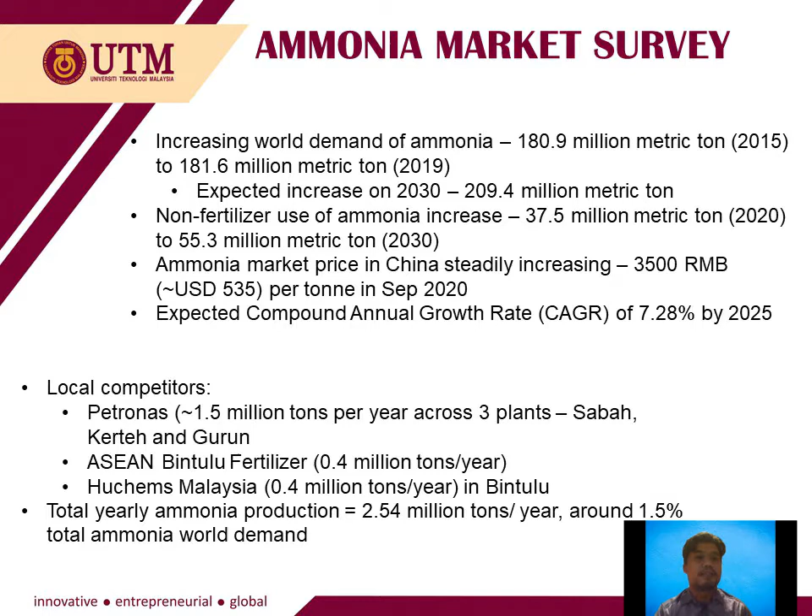And we also chose ammonia as our product due to our local yearly ammonia production, which is around 2.54 million tons per year, which is around 1.5% of total ammonia world demand. So we can see the potential of building another ammonia production plant in Malaysia.

Okay, we chose to build our ammonia production plant in Gebeng Industrial Estate, which is situated in Pahang, due to the attractive incentives and initiatives by the Pahang State Government to promote Pahang as one of the biggest industrial hubs in Malaysia. Also, there are no direct ammonia process plant competitors around the area, so it can help our distribution of ammonia locally.

Also, there are low and competitive utility tariffs, which is a low water tariff by Pengurusan Air Pahang Berhad, so it can help on our production cost and also increase our production profit. Also, in this area, there is development of the Malaysia-China Kuantan Industrial Park, MCKIP, in conjunction with China, which can help our ammonia export to China and also to the world ammonia demand.

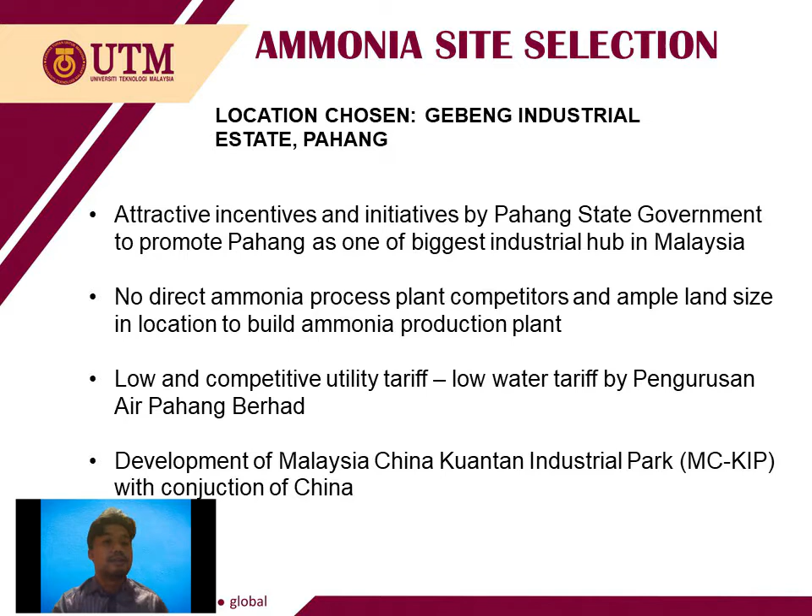Hi, I am Shuaina Shafi. So now we are going to proceed with the reaction pathway to produce ammonia. Basically, the reaction pathways that we propose are the Haber-Bosch process, thermochemical cycle process, and direct synthesis by catalytic reduction of nitric oxide with hydrogen and addition of carbon monoxide. But for our project, we chose the Haber-Bosch process, and I will explain further why we chose that process.

The Haber-Bosch process is an artificial nitrogen fixation process. The process converts atmospheric nitrogen to ammonia by reaction with hydrogen using a metal catalyst under high temperature and pressure. The method for producing hydrogen from hydrocarbons is known as steam reforming.

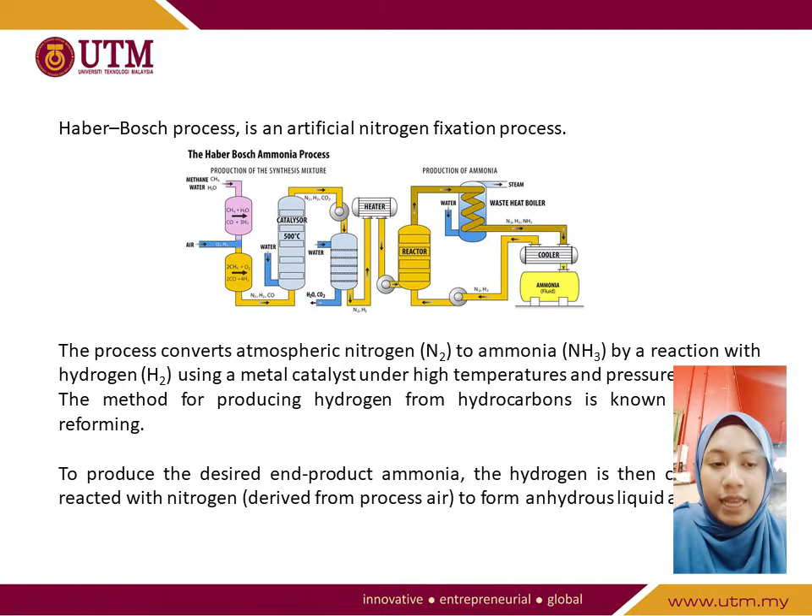To produce the desired end product ammonia, the hydrogen is then catalytically reacted with nitrogen, which is derived from processed air, to form anhydrous liquid ammonia. So this step is known as the ammonia synthesis loop, also referred to as the Haber-Bosch process. Here is the reaction: 3 H2 plus N2 to produce 2 moles of NH3.

Due to the nature of the catalyst used in the ammonia synthesis reaction, only very low levels of oxygen-containing compounds, especially carbon monoxide, carbon dioxide and water, can be tolerated in the synthesis gas, which is the hydrogen and nitrogen mixture. Relatively pure nitrogen can be obtained by air separation, but additional oxygen removal may be required.

As you can see, for gross profit, the weightage is 40%, conversion selectivity 25%, temperature 15%, and produced byproduct 20%. For gross profit, the score for reaction pathway 1 is the highest, which is 5, and the mark is 2, compared to reaction pathway 2, 1.6, and reaction pathway 3, 0.4. After we calculate, the gross profit for reaction pathway 2 is 0.471 and reaction pathway 3 is negative 4.781, which is lower than reaction pathway 1.

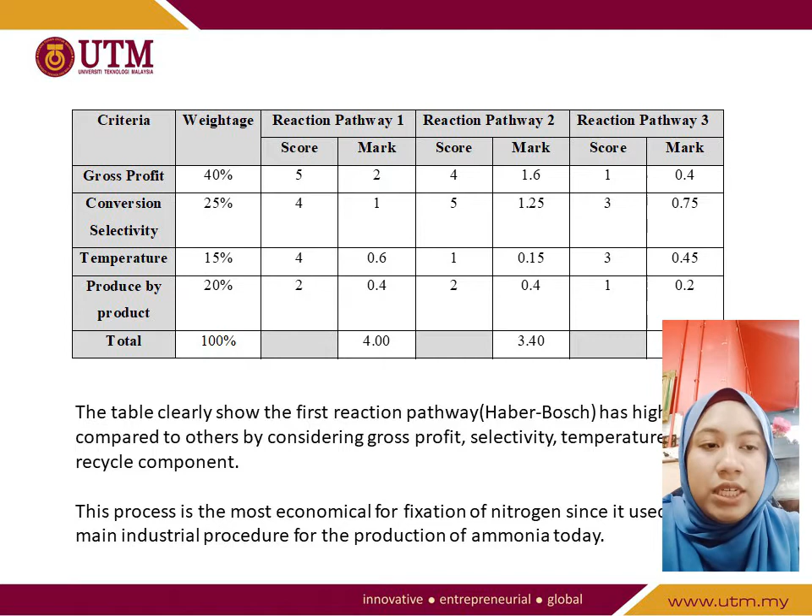So the table clearly shows the first reaction pathway, which is the Haber-Bosch process, is the best because it has the highest value compared to others by considering the gross profit, selectivity, temperature and recycle component. So this process is the most economical for fixation of nitrogen since it is used as the main industrial procedure for the production of ammonia today.

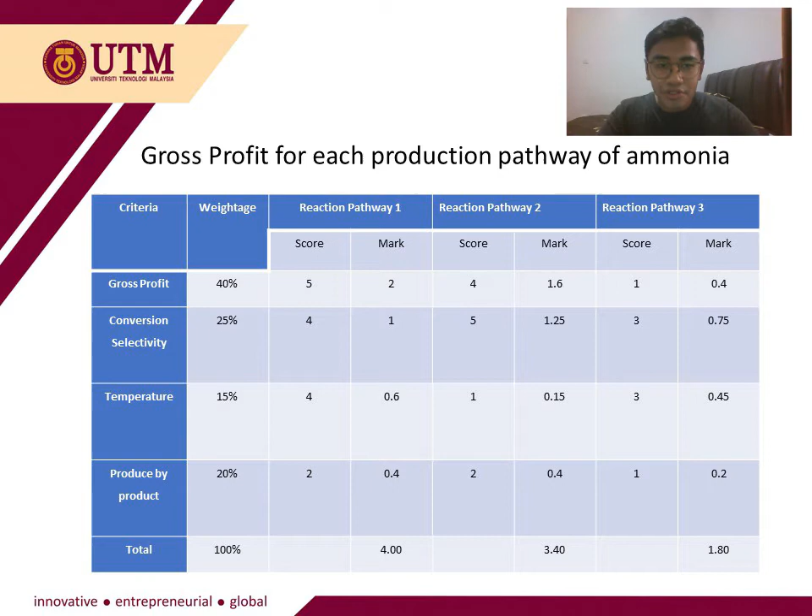Okay, I am Farah Samarigazi and will be presenting on the first and second step of task synthesis. The first step is eliminating differences in molecular types. Here, three reaction pathways are proposed, which are the Haber-Bosch process, thermochemical cycle process, and direct synthesis. And we chose the Haber-Bosch reaction because it has the highest total score compared to the other pathways. Now we move to the second step, which is distributing chemicals by matching sources and sinks.

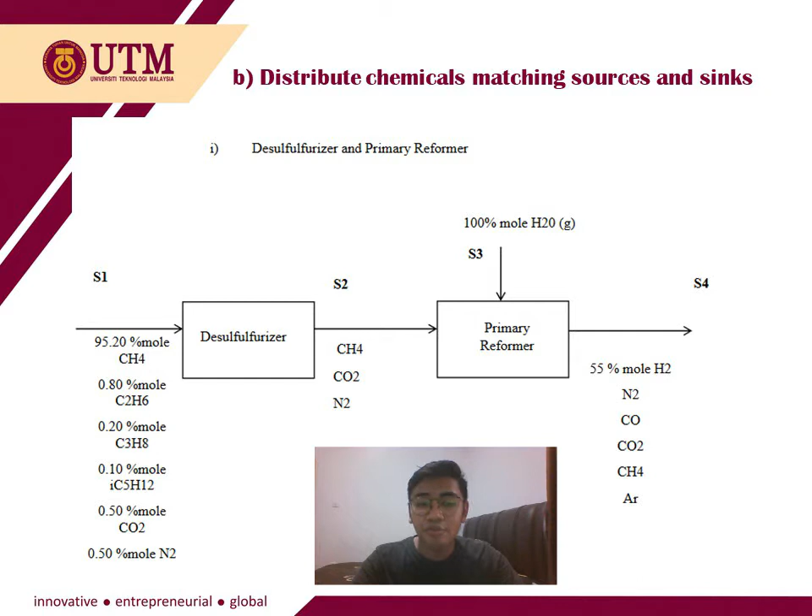In this step, there are some processes, which are the desulfurizer, primary reformer, secondary reformer, carbon monoxide shift converter, methanator, and ammonia converter. Desulfurization is a process carried out to remove sulfur from a material, which in this case is found in natural gas feeds. The primary reformer functions to produce hydrogen gas from the reaction between natural gas and steam in a radiant tube containing a nickel catalyst.

In the secondary reformer, air is added to the gas reaction process. Nitrogen from the air is used for the production of ammonia, and oxygen reacts to provide the heat needed for the reforming reaction. And the shift converter is used to reduce the carbon monoxide content, which can interfere with the reaction in the ammonia converter, and convert it to carbon dioxide.

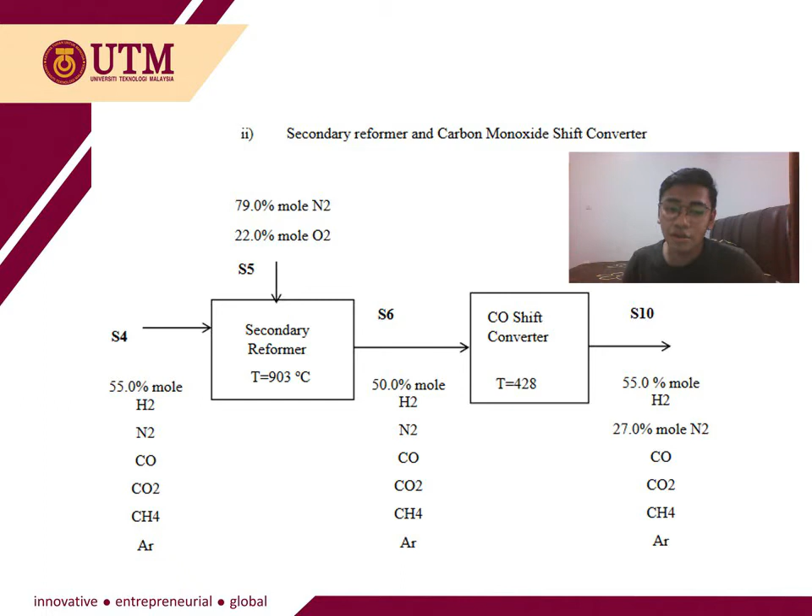For the methanator, the carbon monoxide and carbon dioxide that escape from the absorber can be toxic to the Fe catalyst in the ammonia converter. So the content must be removed by converting it to methane using a nickel catalyst. And then the synthesis gas is heated and sent to the ammonia converter, where nitrogen and hydrogen are reacted to form ammonia.

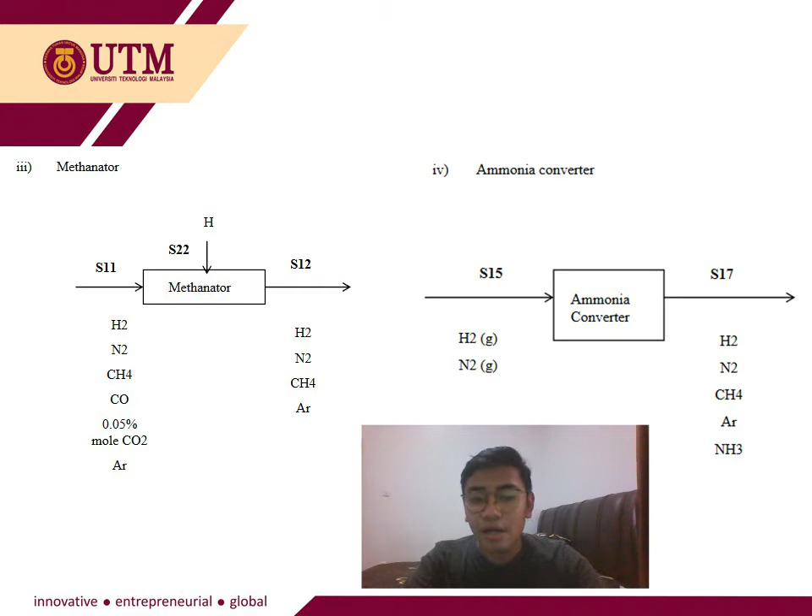My name is Nur Aihanisa and I will present the next task synthesis, which is differences in composition. First, we need to remove CO2 because CO2 is toxic to the catalyst inside the ammonia converter. Next, we also need to remove water because water can freeze and clog the pipe flow in the refrigeration system. So we need to put a dryer inside our ammonia production system.

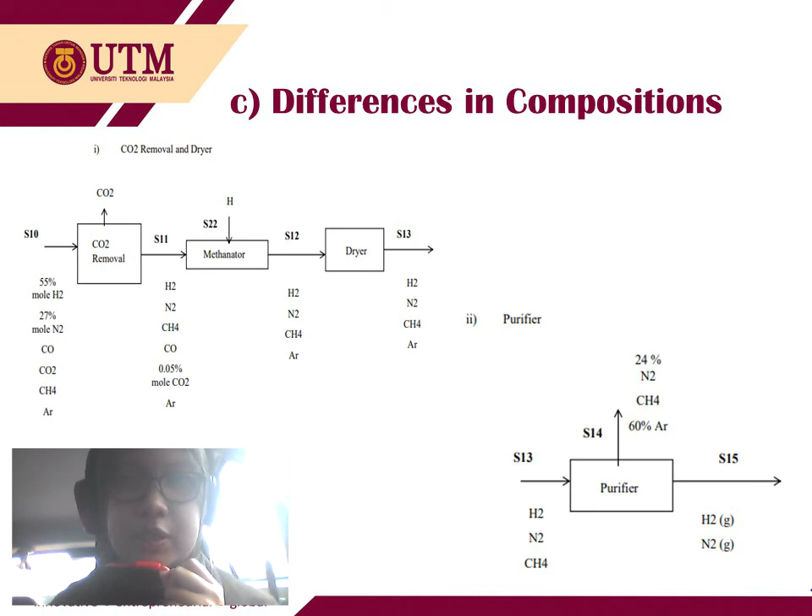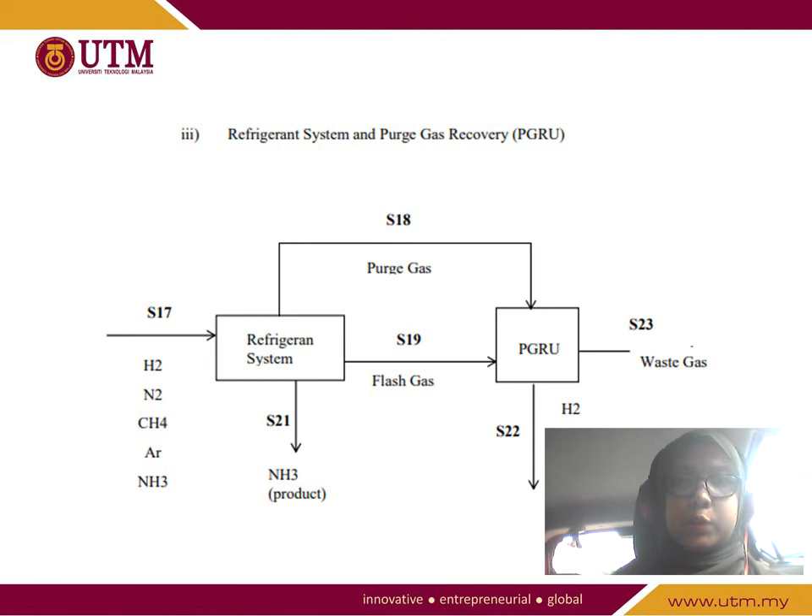Next is a purifier, because we need to purify the gas stream to minimize the gas impurities and to reduce the compressor load. To separate ammonia as our product, we need to put a refrigerant system, and the gas from the refrigerant system will enter the purge gas recovery unit, where the gas will be purged or recycled back to the system.

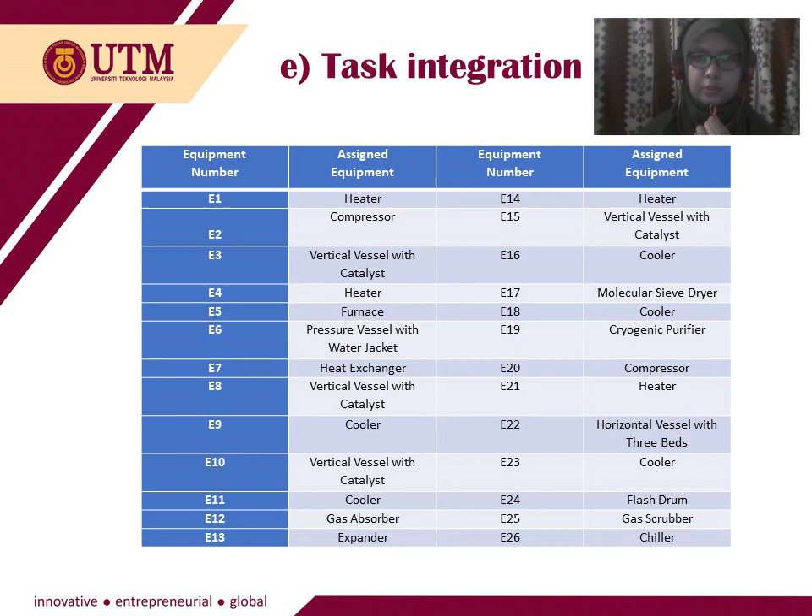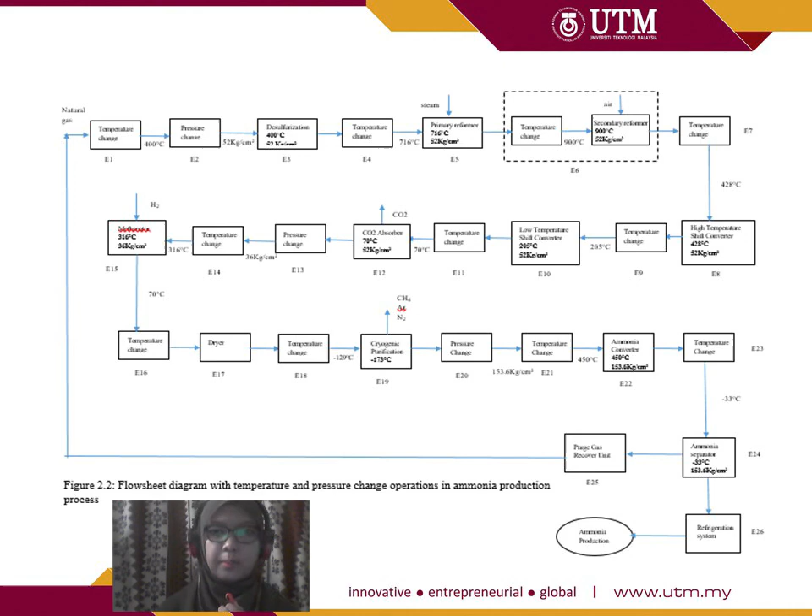Next, task synthesis, which is eliminating differences in temperature, pressure and phase. This is the flowsheet diagram with temperature, pressure and phase change. Next task synthesis is task integration, where we assign equipment to each temperature, pressure and phase change. This is a flowsheet diagram where we assign the equipment according to pressure, temperature and phase change.